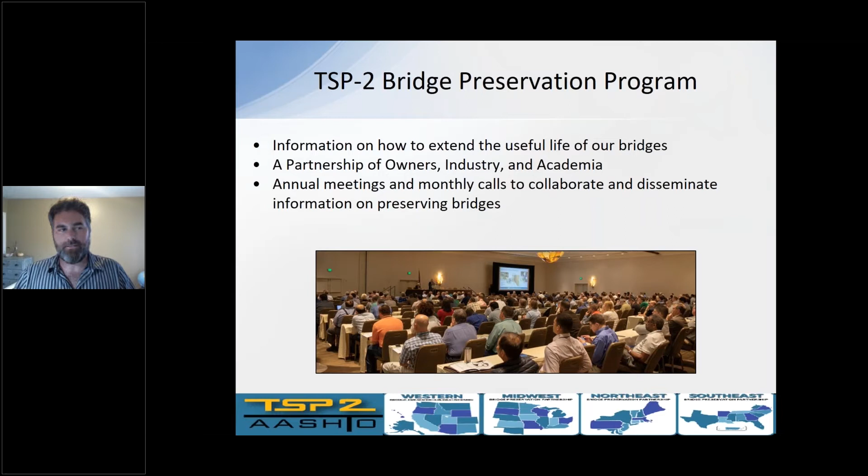We have annual meetings and monthly calls to help collaborate and disseminate information. One of the things that we noticed when we would get together in these large meetings is local agencies tended to be fairly underrepresented. From that, we developed this local agency outreach working group. Locals own about half of the bridge population and are not only encouraged, but actually have chair or director positions within the partnership. So they're actually voting members.

And so as we looked through the spread of those that were attending our meetings, we realized that we're really not being inclusive enough of those local agencies. So Greg Freeman and I co-chaired this working group, and really the intent was to just help engage, to reach out and spread the message of bridge preservation and how it can help those.

So there's about 40 members in this working group, and it's a pretty diverse group. We have a lot of support from LTAP members, academia, industry, FHWA. We have city and county engineers and managers that participate in the group, and then of course DOT members like myself. And again, we're just really looking at trying to engage locals at a higher level.

This is a recent snapshot from InfoBridge. It's an online data repository for condition data, and this is just focused on local agency owners. And so again, I mentioned there's about half of the bridge population, and this shows it by age. And so if you look, the green is obviously where we want to be at with a good condition bridge. If you have a bridge that's less than 10 years old, we're doing really pretty good there. The vast majority of them are staying in that good condition.

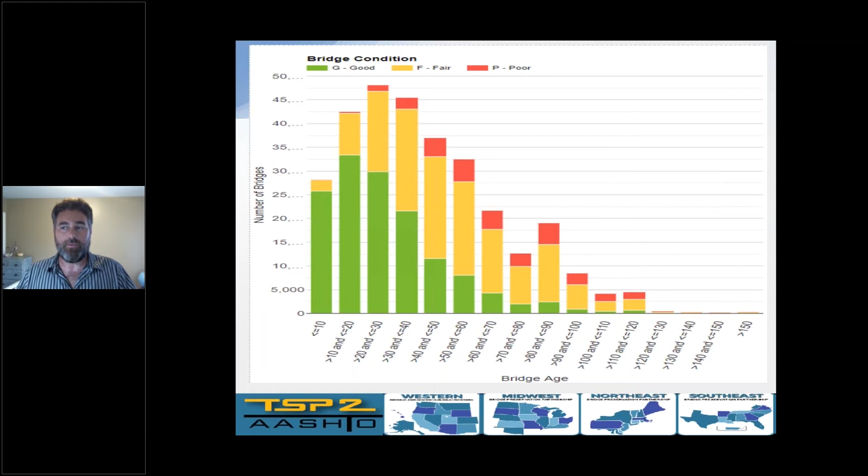And then as we start trending to that 20, 30, 40-year-old structures, they deteriorate. They get downgraded to a fair condition and eventually to poor. And so a lot of what this presentation will focus on is on asset management plans and how to really focus on keeping the green in green and avoiding that early age deterioration.

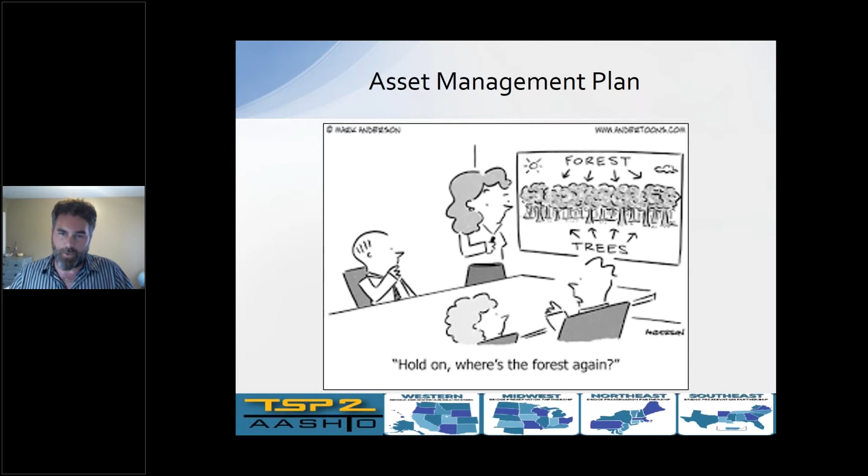I love this slide. I can't take credit for it. I didn't come up with the cartoon or find it. I've been involved with the partnership for quite some time, and in bridge preservation and bridge maintenance for a long time. And every time someone says asset management plan, my eyes cross, right? I look at the forest, I look at the trees, and I try and figure out, I go, hold on, now where's the forest again? Like, what do we really mean when we keep saying asset management plan? How does that impact my daily work? Like, where does that fit into that reactive nature that maintenance often becomes?

And it's really just talking about a framework. An asset management plan is that plan of how you balance your resources. You have three legs to it. It should be a focus on preservation and preventative maintenance. You're going to need some rehabilitation and some timely replacements.

I mean, the intent of preservation isn't that we'll never have to do replacements, but it's about trying to really shift that focus from replacements, which tends to be a focus, especially at the local level, towards more of that distribution of, where does preservation and that preventative maintenance really fit into the picture?

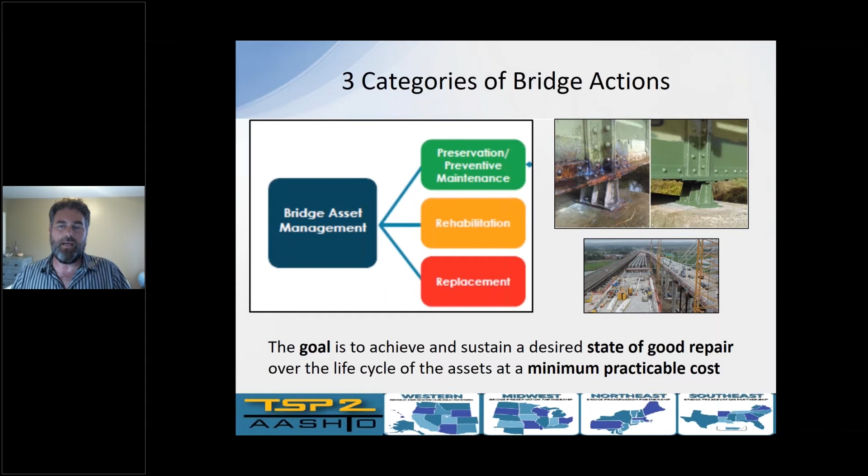Everyone can get behind this goal. The goal is to achieve and sustain the desired state of good repair over the life cycle of assets. And the key is that minimum practicable cost. What's that minimum cost to do this? So we'll go through some of that here.

The three legs, right? So bridge replacements. These are expensive. When you have limited funding, there's not enough funding to get to all of your replacements that you need. It becomes this worst first approach. There's actually an incentive to have the worst bridge on the block, right?

So if there's not enough money to replace all the bridges that really should be replaced, there's this tendency to, well, if my bridge is even worse than everybody else's, now it's likely to compete well for getting that limited replacement funding. We call this the worst first approach. So having the worst bridge available can actually be advantageous for getting that replacement funding, at least with some of the selection programs that are out there.

The problem is this is also the most expensive way to manage an inventory, right? We put all of our dollars into just replacing bridges, we're not going to get very far. It's highly disruptive to the traveling public, and it just takes a long time.

I know in Oregon, we struggle at times where a bridge needs to be replaced. It's on its way to being replaced. It's a huge drain on maintenance as we're heading towards that replacement, right? It's the potholes, the emergency repairs, the things that you just can't defer anymore. Even with the replacement around the corner, you're going to continue investing in this bridge.

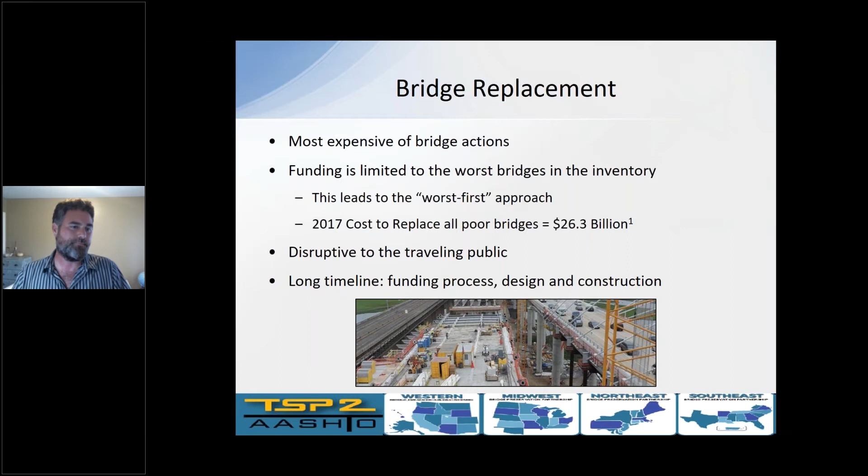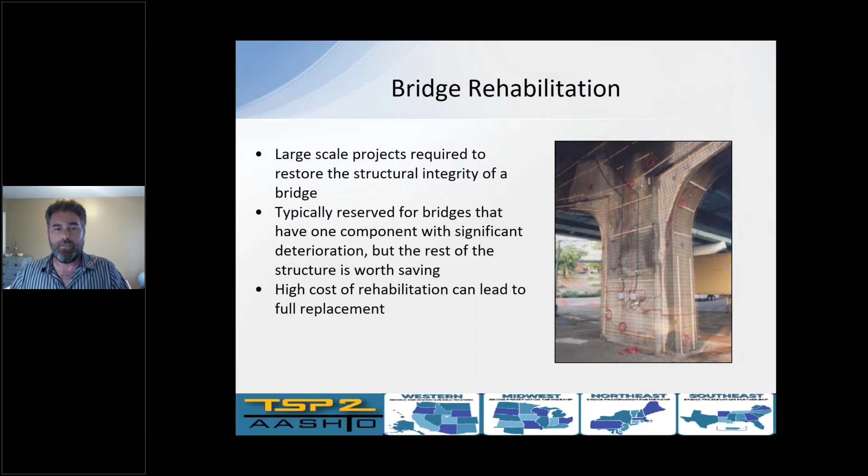So our next tier from bridge replacement is a bridge rehabilitation. These have a place in there. These are when your bridge conditions have deteriorated to the point of needing really some major repairs. These are typically large-scale projects and pretty costly, but they're done on bridges where it's worth keeping, right? The replacement cost is high enough, or the bridge is still serving its purpose. There's a place for investing heavily into keeping that bridge in service.

And then you get to bridge preservation, the third leg of the stool, the one that we like to focus on in our partnership. And these are just actions and strategies that prevent or delay the deterioration. So some of them actually do improve the condition slightly, but in general, the idea is just slow down the rate that it gets worse, right? So it's not particularly exciting.

One of the struggles we have with bridge preservation is that there's no ribbon cutting after you're done sealing the cracks, right? Those that control the purse strings often like to focus on that. I have a nice shiny new bridge. It's got all modern features. You have a ribbon cutting. It's an exciting ordeal. It's just very expensive. Preservation is those lower cost activities that can really extend the life of it.

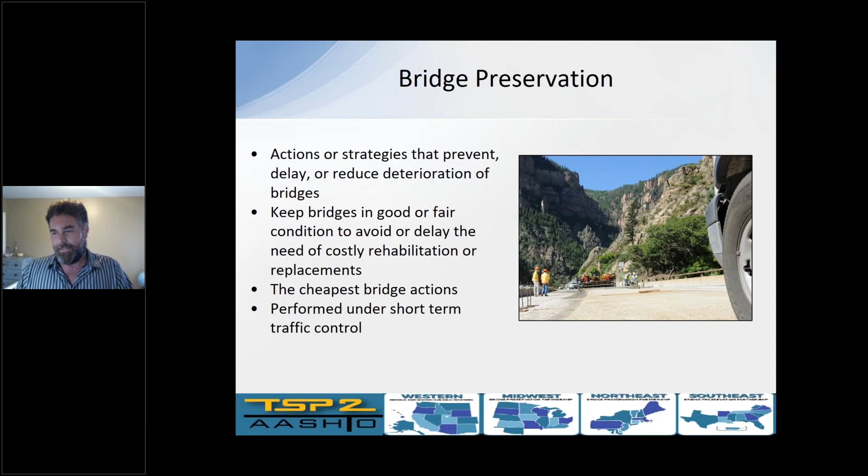One of the things I like to focus on is the short-term traffic control. Typically, preservation actions don't require detours and widening structures to get access to the work. There's lots of different components on a bridge that are worth preservation and maintenance. The deck is that highest value item though. It's the one that the public sees most often. It's the one that's exposed to weather, to traffic, gets the most wear and tear.

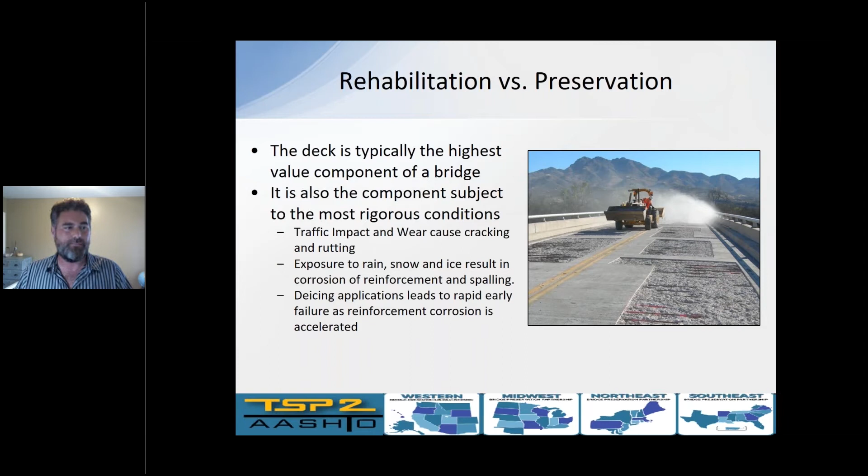And when it comes time to do work on it, it's really hard to do work on the deck without disrupting traffic. And so I think it's a great example to kind of compare the pros and cons of rehabilitation and preservation. So we'll go through a few slides on that. Rehabilitation.

This is kind of what it looks like, right? There's lots of different ways of rehabilitating a bridge deck, but in general, it's pretty invasive. You're going through and you might be grinding off a layer of concrete, probably a lot of patching. You might be pouring back a concrete overlay with some kind of a cure period.

When I look through deck rehabs in Oregon, I noticed that 50–60% of the total project cost is actually not going to materials, labor, etc. It's going to just getting you access to that deck. It's setting up hard barriers. It's handling detours. It's a big issue for us, right?

As a taxpayer and as a bridge owner, I just hate seeing so much money going to getting us access to the location and not getting that bang for your buck of seeing good done with it. And then another part is once these conditions get bad enough to warrant that rehab, we're getting constant phone calls for the maintenance crews to get out there and patch, right? It's something that the public sees.

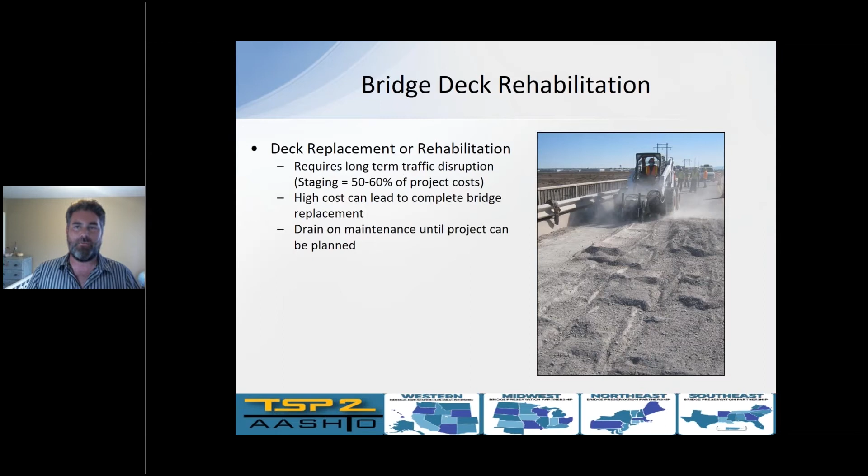This is stuff you can do during short-term traffic control windows and then return the bridge to normal traffic as soon as it cures, as soon as it's done. Good bang for your buck. Almost all the dollars for this work go into actually a product and labor for getting it installed.

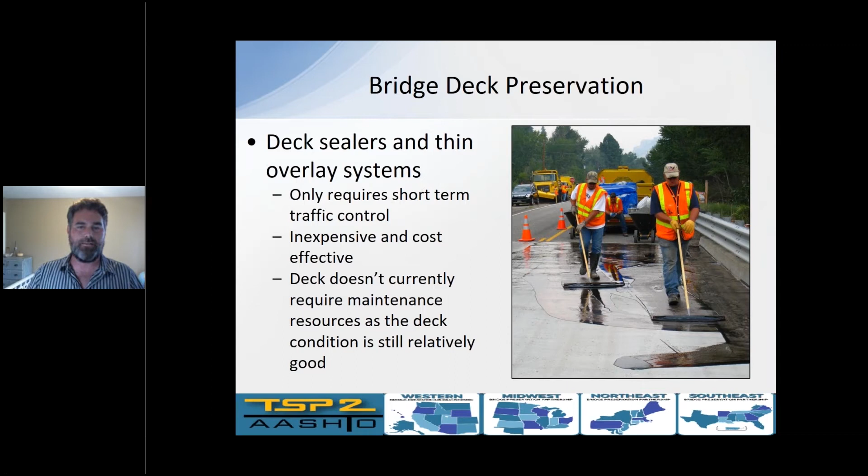When we talk about bridge preservation, one of the biggest challenges we have is showing the benefit to it. You can talk about how maintaining and preserving your infrastructure makes sense, and it's easy for folks to understand that concept, but it's really tricky to actually quantify the benefit. Life cycle cost analysis and alternatives analysis are gaining a lot of momentum in the bridge world, and preservation has had a real barrier to being able to really quantify, right?

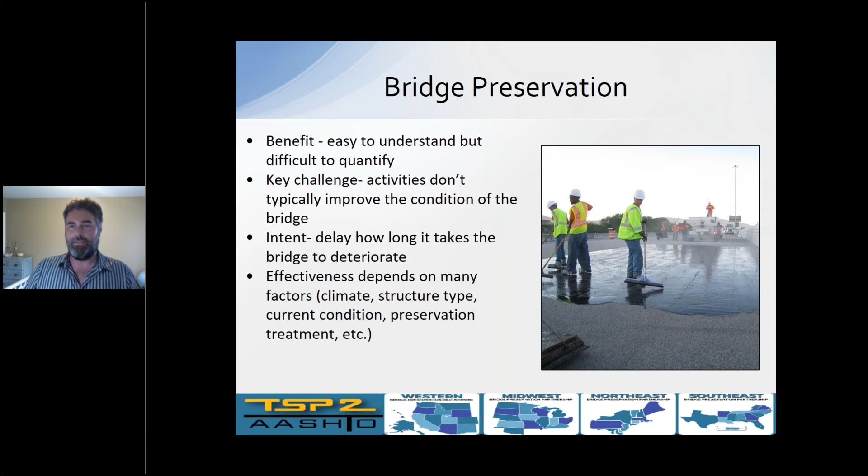If I stop the chlorides from going into that deck, I get the water out of the deck, how much did I extend the life of it? I will tell you that there is a lot of work that's going into this, but for now I like to focus in on, not getting into the exact equations of trying to show exactly the cost benefit of it, but rather go at it from a conceptual way. I find that a car works really good for an analogy.

Taking care of your car requires certain things. Similar to sealing up a bridge deck, I need to change the oil in my car. Some of us go 3,000 miles and bam, we're in there for an oil change. Some of us go 15,000 miles before we get an oil change. Right? There's a risk reward with some of that, and certainly a deterioration. It's really hard to quantify exactly when your engine's going to blow because you're not changing your oil on a regular basis. But generally, the public will understand that it's a good idea to swing by Oil Can Henry's and get your oil changed, right?

Similarly, washing your car, rotating the tires, doing your transmission service, these are all things that are really hard to quantify exactly the benefit you get out of it, but the concept's easy, right? We understand that if we don't do these things, we're going to end up rebuilding our engine. We're going to have to do body work or repaint it or replace the tires and the transmission, things that are very expensive. We lose our car for a certain amount of time as it's taking place, right? That's that disruption of traffic.

And so I really like this car analogy, and it works well for bridges, trying to communicate just how big of a benefit we can get from doing our proper maintenance. So I keep saying preservation, preservation, preservation. What does it look like? There's a lot of different examples of preservation, and at the end of this presentation, I'll show you a bunch of different resources where you can get a lot of info on it.

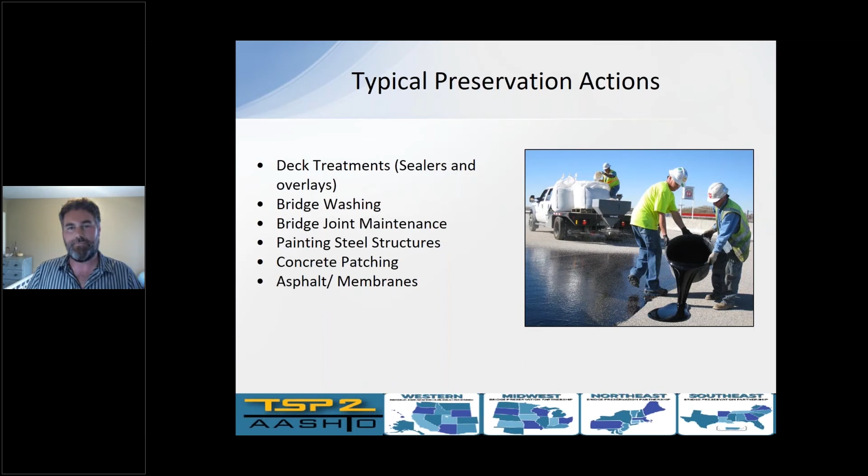So just maintaining those joints in good working order, spot painting and painting your steel to keep it from corroding, patching and repairing your concrete, asphalt with membranes. These are that low cost maintenance that falls in the category of preservation. One of the things to look at is what bridges should I be preserving, right? How do I find them? That can be a challenge, and so there's some things to look at.

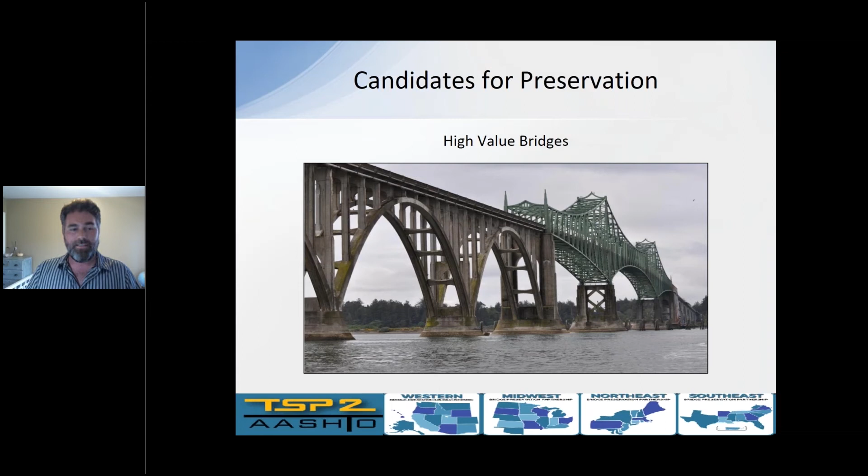So the photo here is a beautiful historic structure on the Oregon coast. It was built in 1936, and so this is an older structure. It is one that is so large and has so much historical significance to Oregon that we don't intend to ever replace it. One, the funding would be a nightmare to come up with the cost to actually replace a structure of this size. We just don't have it available. But also the historical significance, the communities invested in keeping this bridge around. So if you have no plans to ever replace a structure, that is a really good indication that it is a good candidate to preserve.

Aside from just those huge bridges, those high value bridges, there's also your bread and butter bridges in the inventory. And for those ones, what you really want to focus on are the ones that are in this green area of the curves, those bridges that are in good condition. That's where you get the most bang for your buck. You have a bridge that is on its last leg, it is in very poor shape. Trying to seal it, take care of it at that point is probably not going to do much for you, right? Once you get down on that downhill side of the curve, you've already lost your benefit of the preservation, that preventative maintenance.

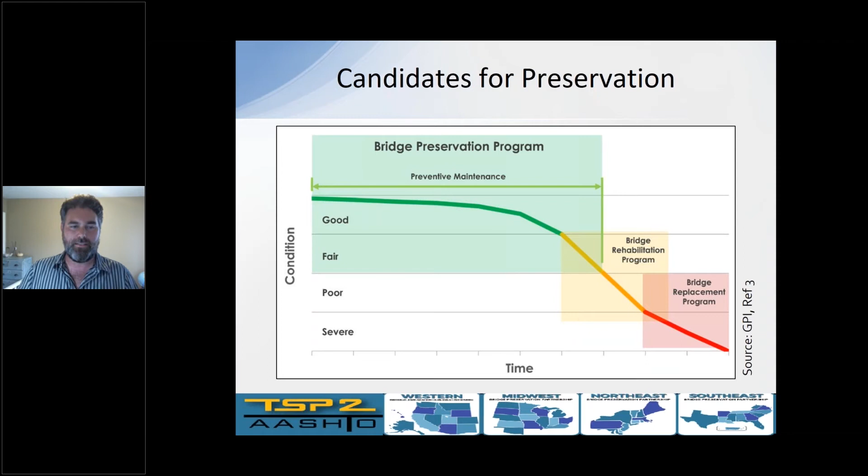So I like this graph. It shows that there's overlap between the different categories. It's really hard to say that exactly at this point preventative maintenance is no longer effective and you're on to rehabilitation. A lot of judgment has to go into that decision. So if you're looking for bridges in good condition, you already have most of the information at your fingertips. The National Bridge Inspection data is very useful. The NBI ratings for your deck, super, and substructure will give you that first indication, right? Is this bridge in good condition or is it in poor condition? It'll kind of help that first level of filtering to find your good candidates.

Once you get beyond that, I would really encourage you to look down into that element level data. It's far more useful, especially when you start looking at your deck, for looking at, well, what's causing this to rate well or rate poorly? What are the defects? Is there cracking? Is there spalling? Really getting down into the project level information. But just as a start, look for your NBI data.

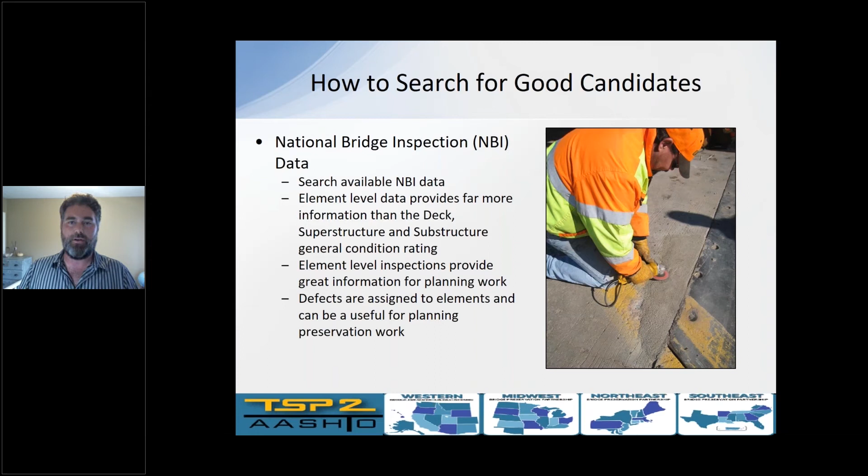As you start developing that list of bridges that could be good candidates for preservation, you need to start developing that preservation project. You need to start thinking to yourself, am I going to contract this out or do I have some in-house forces? I can't include it in the presentation today, but I'll show you resources where you can find it. There are a lot of preservation and preventative maintenance activities that are very easy to accomplish, even with crews that have very limited experience. A lot of the products out there have gotten to the point that they're not as sensitive to having high-tech equipment. A lot of this stuff is a paddle mixer and a garbage can for a bucket to mix in, and squeegees. There's a lot of benefit that can be done with in-house forces.

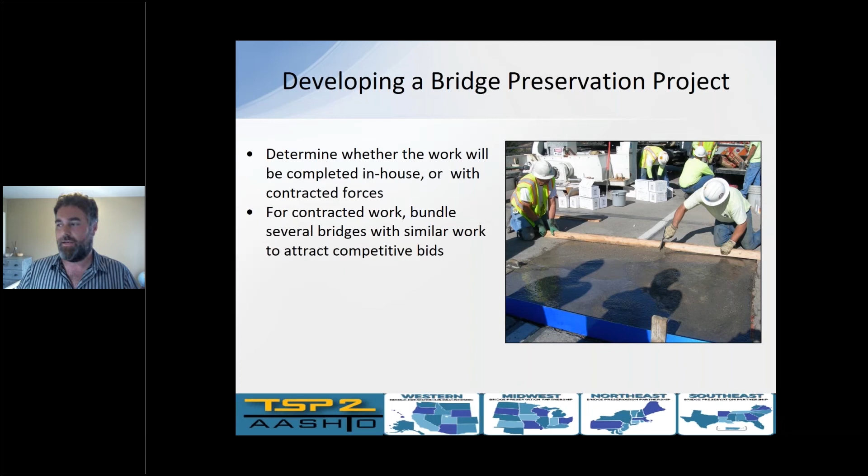If you're going to look at contracting work, then preservation activities tend to be kind of on the inexpensive side, and so you need to look at bundling it together, right? Make it enough work that it's of interest to the contractors to bid on, get a good competitive bid. So when you start to put together your package, obviously how you're going to pay for it is a big component of that as well, right?

I said these are the lower cost activities, which is true, but still the money has to come from somewhere. Moving ahead for progress, MAP-21 and the FAST Act recognize the benefit of preservation and actually made these eligible for federal funding. The federal funding is available for this work.

However, what we find is that a lot of the asset management plans really prioritize that worst first approach. The bridge in that really bad condition gets its hands on that funding. But it is important to know that that is not a federal requirement. The feds are supporting preservation.

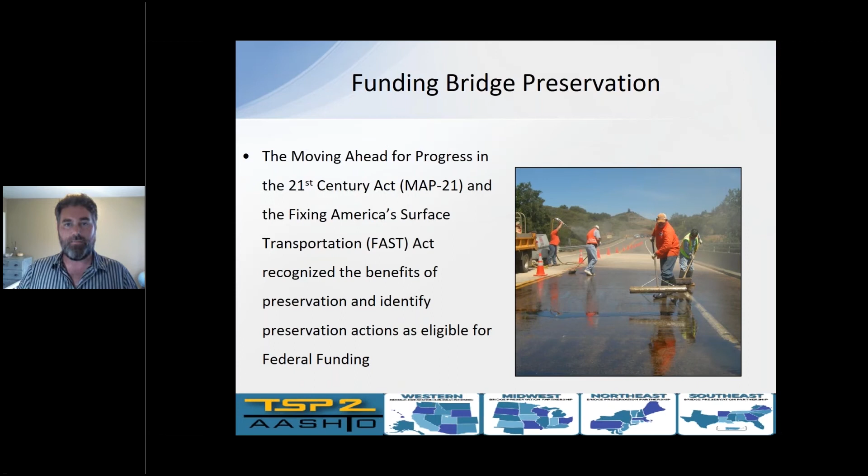These are from the FHWA Bridge Preservation Guide. It's a tremendous guide. I have a slide on it just a little bit later. A lot of the charts you'll see and that you've seen throughout the presentation are copied directly from that guide, right? And so these are activities that are cyclical maintenance that qualify for federal funding. Just simple actions as far as cleaning and flushing your drains that you can get some real benefit from.

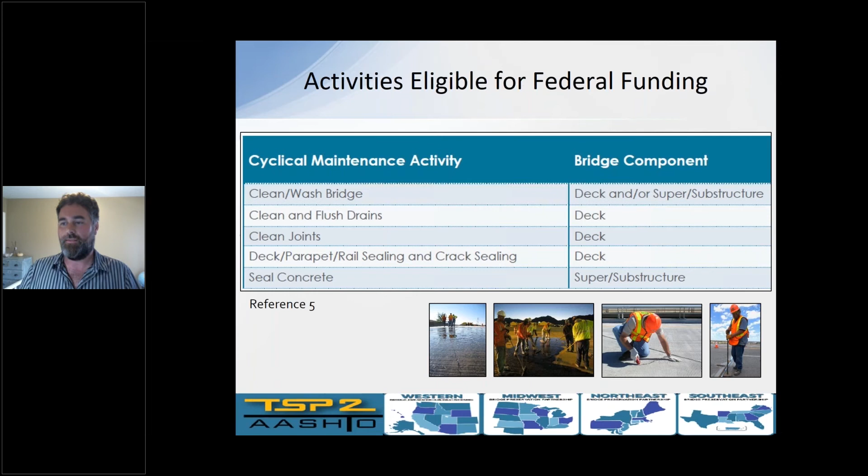And the idea is trying to figure out how do you put that into a project? How do you bundle it in a way that it's something that the contractors would be interested in competing for? And then how do you get it set up in a way that it can compete for funding? Lots and lots of activities.

When we were looking through all the activities that qualify for federal funding, we were saying, well, okay, so who's doing preservation at the local level? How are they funding the work that they're doing? We had a hard time really making that connection, understanding exactly what's happening throughout the country.

As most of you are aware, there's a lot of local agencies out there, and they're very diverse. Some of them rival the size of DOTs, and some of them have just a handful of bridges or none at all. And so we wanted to get a survey together to get some information. This just went out recently. We actually got over 500 responses to the survey, which is highly encouraging for us.

And from that, we saw that 76% say they are doing some level of preservation. So they're either doing that cleaning, that joint maintenance, they're doing something that is helping to extend the life of their bridges. So that is really encouraging. Three quarters of those who responded to our survey said, yes, we're doing something, right? They may not be doing as much as they could or should, but they're doing it to some degree.

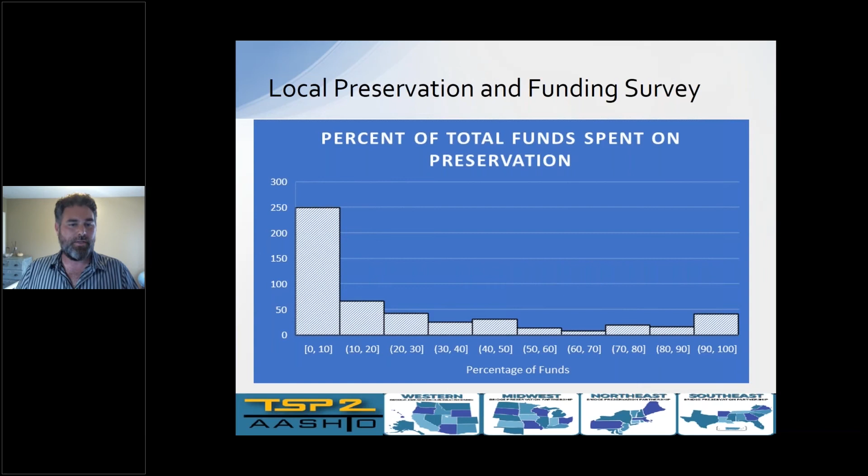This is a breakdown of what percentage of their total budget they are spending on preservation. You can see there's a handful that are all the way over there in that 90 to 100%. Almost all their available funding is going to just maintaining what they have. But not surprisingly, the bulk of the responses said, hey, we are doing some preservation, but it's a very low percentage, where 0 to 10% of total funding goes towards this activity.

Again, there's three legs to that asset management stool. You understand that some funds need to go towards replacement and rehabilitation, but obviously we'd like to see this distribution move a little bit more towards the right, where you see a greater percentage of funds dedicated to preservation work. What we got from this is that, although federal funding is available for preservation, and state funding is available, or could be available depending on your state, the selection process as a whole tends to still favor that worst first approach.

And with support from the FHWA expert task group, we're working on reaching out to some of these local agencies to build the case studies where we can actually get some information on some of those that have really got a system together that's working well for them to help encourage this type of work.

And we're going to reach out to some of those that say, hey, look, I've been trying and I just cannot get through that project selection process. I can't get the funds heading in the right direction for it. And hopefully through the results of that case study, we can go ahead and share that information to others on, this is what's successful and this is what's been a struggle.

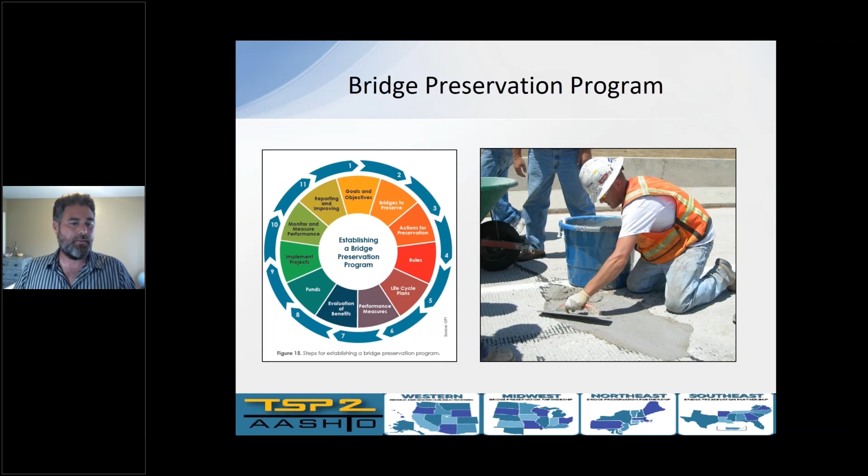In the Bridge Preservation Guide, there is information on establishing that preservation program. A lot of it has to do with identifying the work that we're going to do, so stuff we've already covered, good candidates for preservation, and then it's achieving your goals. So this is an example of what cyclical maintenance would look like for preservation. There's ranges given here. It's kind of hard to say exactly what bridge needs work at what time, but this is a chart that could show some of that.

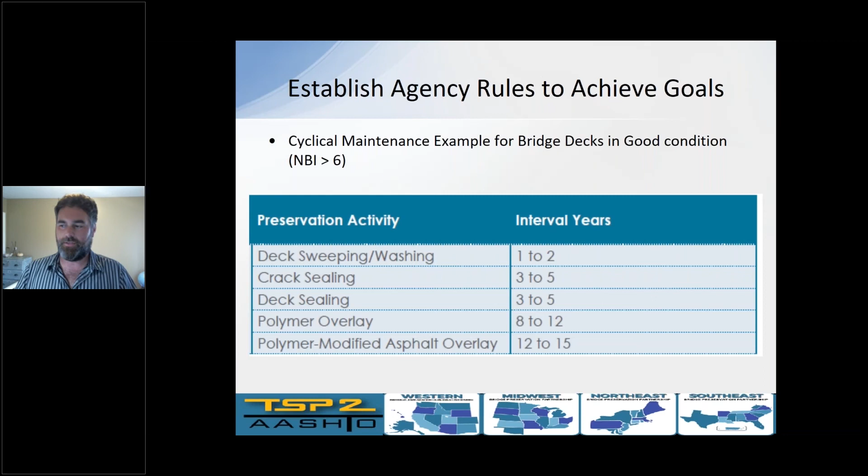Once you start establishing the process, the selection process, and implementing the work, there's this trying to measure the benefit. I will say there's a lot of national work going on right now, research and digging through data to help with this piece, that measuring the benefits. But it's important, right? Those that have the hands on the purse strings and the finances, they want to know what's the benefit for this work. And so that's part of that preservation program, is you got to show, look, I've increased the life of this structure by doing this activity.

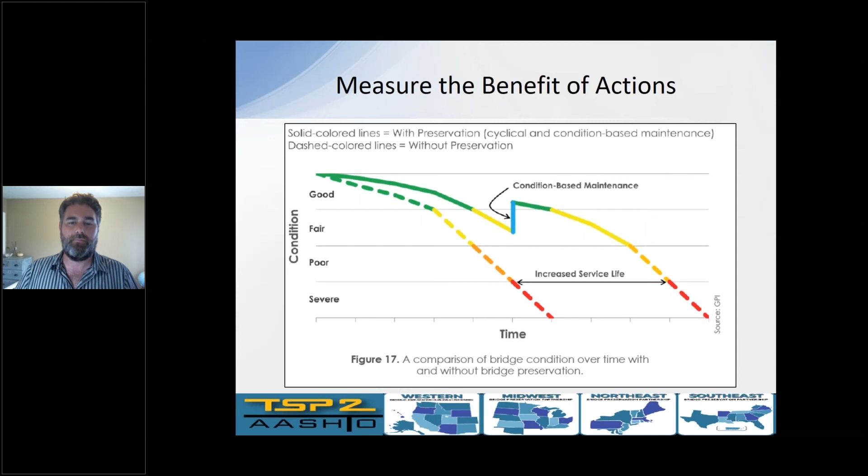Monitor and reporting. This is one of the very useful cycles where you can show the trends of your bridges going from that good to poor and back upward, right? So the goal is to really slow the rate that things are moving to the right and hopefully catch up on how quickly things actually improve moving to the left.

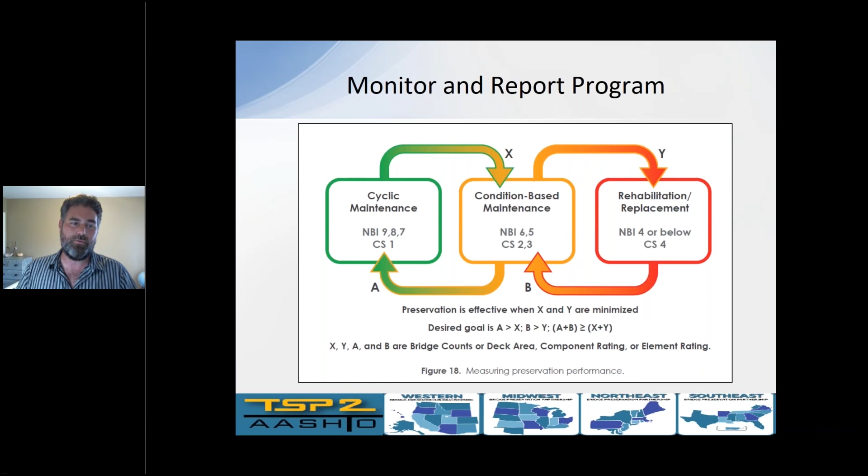Michigan is a great example of a state that has shown the benefit of preservation. Back in '98, they passed a gas tax and said this is specifically heading towards preservation. This graph shows year along the bottom, and then the number of bridges that are hitting that poor condition, that structurally deficient, on the left. And when this started, there was almost 140 bridges every year that were falling into that state of disrepair, very poor condition, right? Michigan knew this was unsustainable, so they started this preservation program.

And as they continue to increase the funding going into preservation, they show this nice linear trend downward of how quickly their bridges are falling in that state of disrepair. They're at a point now where 30% of the total bridge program budget goes towards maintaining and preserving their bridges.

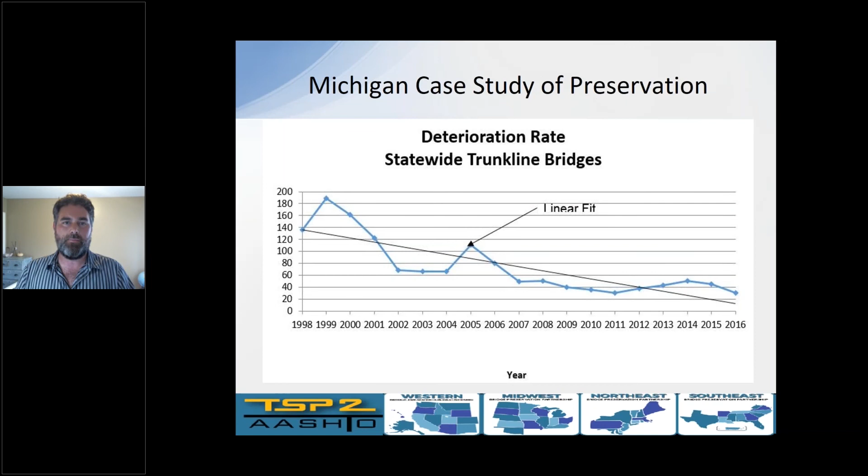I mentioned there are a lot of resources that are available to get really down into the weeds. You know, I keep mentioning preservation, all these different activities, what an asset management plan looks like. You're not going to get it all in a 30-minute presentation. But fortunately, FHWA, TC3, TSP2, which is us, the LTAPs, there is a lot of folks out there that really want to get you information on how to implement these plans and do these activities.

I would start with the NHI training. There is a lot of courses that are available online. And I think some of them are in person, where you can go through and start seeing a lot more detail on what does bridge maintenance painting look like? How do I address my movable bridges? And the preservation fundamentals. So I'd strongly encourage you to look through these. I believe that we're going to put these presentations on our website when we're done, so you can grab these off of here. But if you just Google NHI training, you'll come up with these as well.

There is a bridge preservation newsletter that gets sent out. This is just from the May edition. Lots of great content, narratives on what's happening in the world of preservation. There are FHWA pocket guides. These are a really cool guide that were put together. One of the things that we notice is that, you know, at times you'd see a product that was installed in one state that they loved. It worked fantastic, right? They swore by it.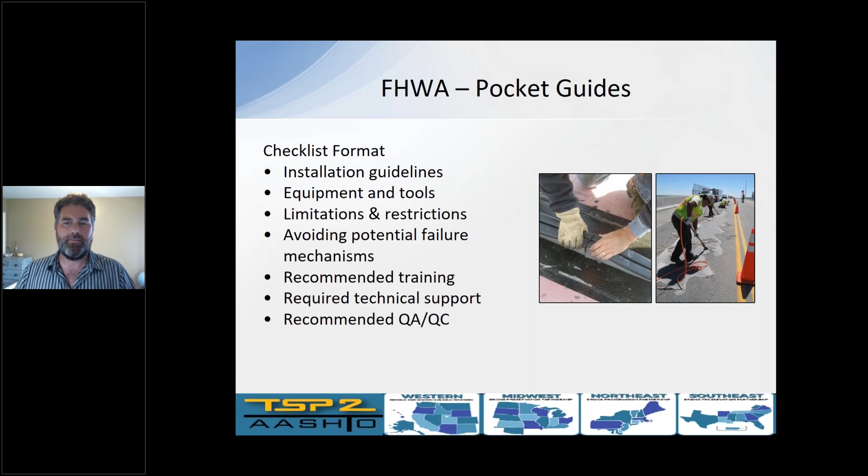And so you can see there's quite a few guides that have already been developed, and I know there's more underway. But it's that installation guidelines. It's very plain language. It goes to a checklist and equipment and tools. They're very comprehensive, put together by some national experts on how to do this work. And it's really just trying to get the most out of your money, right? If you repair a bridge joint that was leaking and you install it poorly, it'll leak from day one, right? That's not a good bang for your buck. And so this is ways to do it well.

Throughout this presentation, I've been copying or stealing items from this bridge preservation guide. I found this to be a very useful tool, great graphics, and something that has some real credibility you can take forward to policymakers and say, hey, look, FHWA is supporting this, and this is how they're doing it. And so I strongly encourage you to download this if you haven't already.

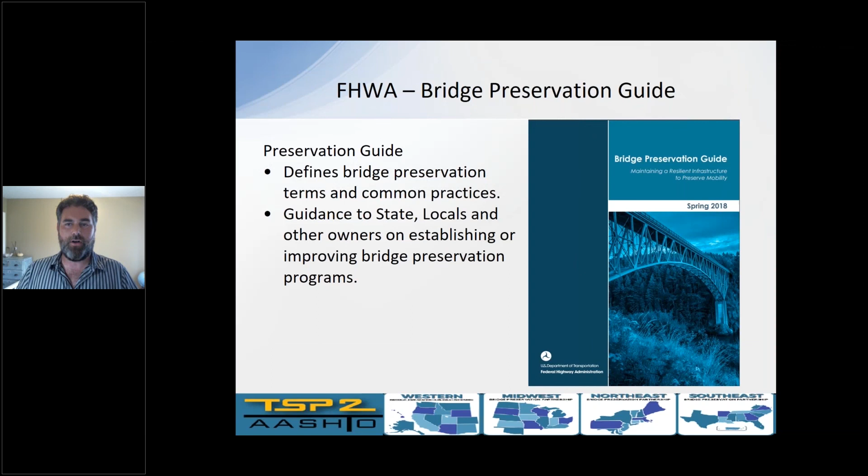AASHTO TC3 is in partnership with TSP2 and also the FHWA BPT expert task group. Right, we get so bogged down in our acronyms at times, but anyways, TC3 is generally available to local agencies. I think most of the states have partnered together so that they have free access to a lot of the content on here, and it's definitely worth looking into.

And then of course there's the TSP2 partnerships. There's 4 regional partnerships across the country. You can see along the banner of all my slides, I have them. There's the West, Midwest, Northeast, Southeast. We do get together nationally at times, but one of the things I would say is they have monthly phone calls where they will host a technical topic. Sometimes it's a presentation on how to do an overlay, or a presentation on something that's done.

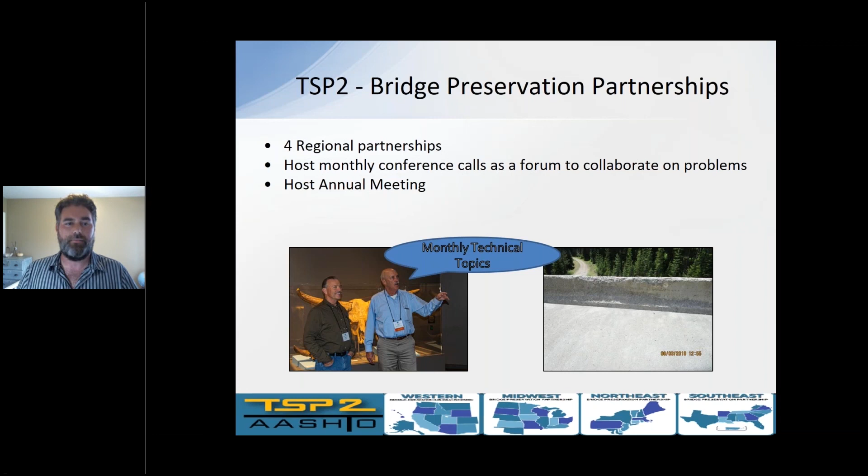Sometimes it's someone putting forward a question. I've used it quite a few times for saying, I got this weird crack going on in this spot. I have some concerns. Has anyone else seen this? And you can get some direct feedback. And so I would strongly encourage you to think about attending these. They're just remote, 1 hour, and I found them to be very useful and helpful, and also a good networking option. If you don't get anything from this presentation, at least write down tsp2.org.

This is the website that serves as the clearinghouse for all the information that this partnership puts together. It is free, and I mean 100% free. It is all on there. It's tough to single out the content to focus on, but the preservation archived video presentations are amazing. And I've heard lots of locals and state owners say the same thing. So every presentation that's been given over all these meetings gets recorded and archived into one of these categories.

So you can go in there if you're having trouble with your scour mitigation and click on it, and there'll be a whole list of different presentations you can go into and just watch. They're posted on YouTube and linked here. And then if you like the content in the presentation, you can see who gave it, and you can also download the actual presentation itself. Very, very useful content.

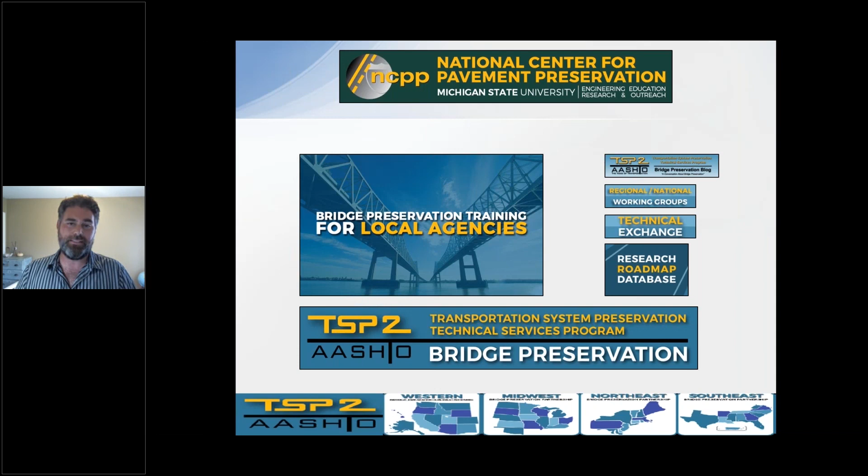There's also training offered through TSP2. Of course, there's the one that we're giving that's an intro to preservation. There's also one that's hosted out of NCPP, where, in a non-corona world, historically they've come and actually given instructor-led training to local agencies and been able to tailor that training to the needs of that particular agency. So with that, I'll go ahead and end my time here.